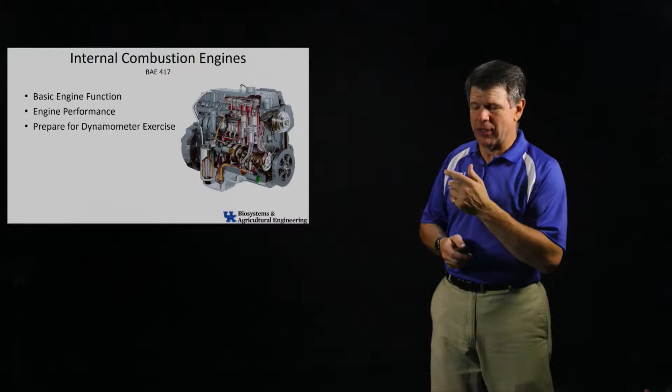The second stroke, then, the piston goes up. This is what we call the compression stroke. And in the compression stroke, we're actually taking that gas, compressing it to some pressure, and then at the top of that stroke, or very near the top of that stroke, when that piston gets to the top, we're going to ignite that fuel. When we ignite that fuel, it burns, thermal expansion.

It's going to push that piston down, and then we get the stroke, what we call the power stroke. And that's where the piston comes down, the exhaust is burning, it's expanding, it gives us the power, pushes that piston down. And then when we get to the bottom, now we have all this burnt fuel inside the cavity above that piston, and we've got to get rid of it, those exhaust gases.

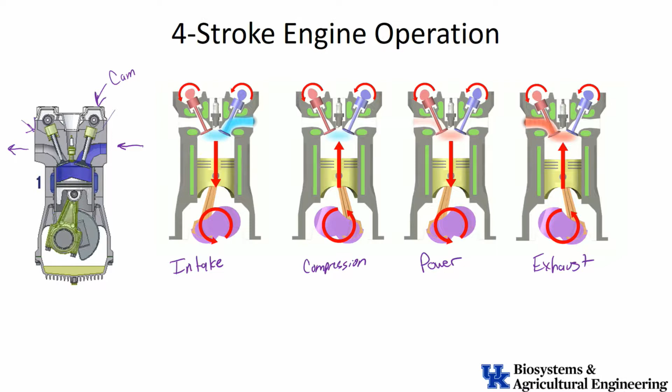So that's the valve that lets the exhaust come out of the engine. Okay, so this is a four-stroke cycle that we see working. Fairly simple, fairly basic. And again, it's what was developed back in the early 20th century to make an engine work.

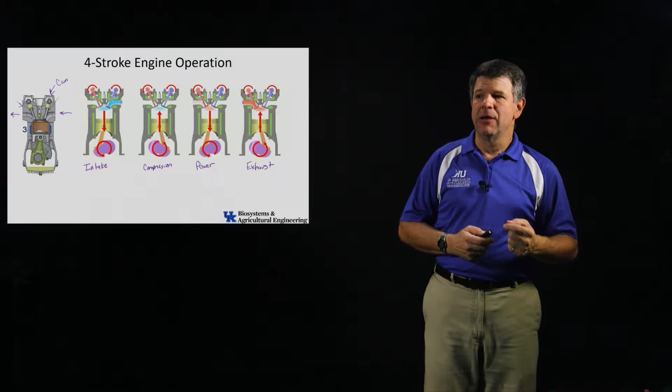There's been a lot of refinements on that, and we could spend a lot of time looking at details, and we won't in this class. Again, we're looking at an overview, a fairly broad picture idea of how these things operate, but that's the fundamentals of the four-stroke engine. Four strokes: intake, we pull the gas in, we compress it, we have a power stroke, and then we have the exhaust that we have to get rid of.

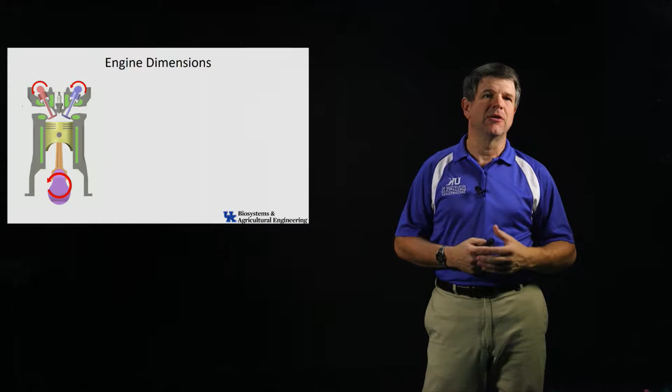Okay, let's go a little bit more into detail here and talk about engine dimensions. So let me look at the engine, and we characterize the engine by its displacement. We talk about so many cubic inches, so many liters, if you see it on automobiles and everything else. How is that defined?

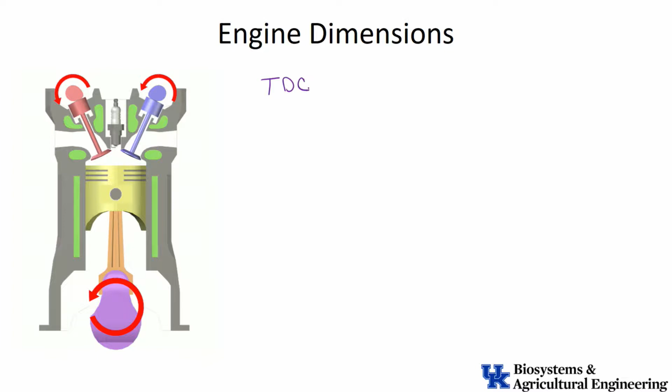So let's look at the graphic here, and you can see this same piston we have, shown at the very top of its stroke. This we actually call top dead center, TDC, or sometimes head dead center, HDC. So when it's at the top, we say it's at the top dead center or the head dead center. I'll make a mark here for where the top of that piston is right now.

Now, when that crank turns around, as you see at the bottom here, the crank is going to move around. It's going to come down to the bottom, the crank will be located down here, and that will pull this piston down to some location. This would be the bottom, so we would call this the bottom dead center, or sometimes we call it crank dead center, CDC. So either bottom dead center, BDC, or crank dead center, CDC.

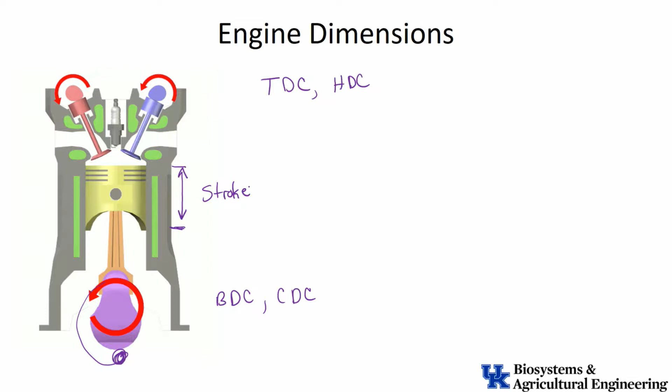The distance in between these two is what we call the stroke. That is how far that piston moves in one stroke. That gives me the displacement. So the displacement then, when I define the displacement of the engine, it is going to be based on that stroke. Let me look at my notes to make sure we stay consistent with your textbook and everything.

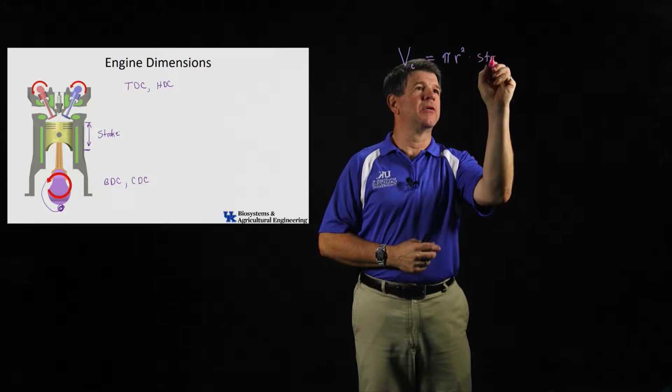We call this V sub C, and V sub C then is the displacement, or the volume that is displaced by a cylinder. It's very simple, it's just a cylindrical equation. So pi times the radius of that cylinder squared, pi r squared, gives me the area, times the length or the height of the cylinder, which is going to be the stroke. That's the distance you see over there, the stroke of the cylinder. So it really has nothing to do with the dimensions or what else is going on in the cylinder.

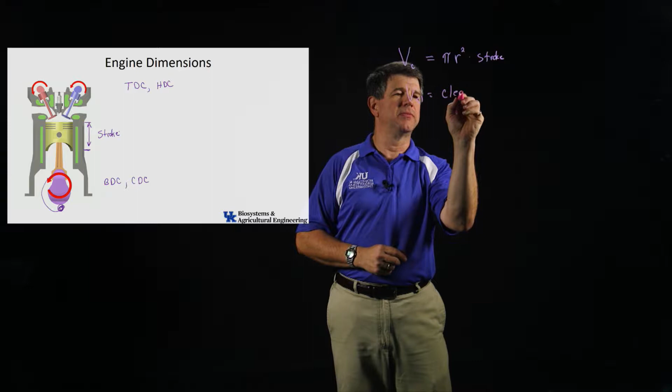Now look at the top of the cylinder. You can see at top dead center, as shown here right now, there is some space on the top of that cylinder. That space above the cylinder we call the clearance volume, V sub CL. When that piston comes all the way to the top and gets to the very top of its stroke, you can see there is some space up there. The volume does not go to zero. That clearance volume is going to be pretty critical in how we define what happens in the cylinder to get to the compression ratio, which is what we really need.

So let's define something else. Let me define the total volume, V sub T, the total volume of that cylinder. The total volume is equal to the clearance volume, V sub CL, plus V sub C, which is the volume displaced by one cylinder. So that's the total volume.

Now the critical thing, for engines and different kinds of engines—we're going to start looking at spark ignition, gasoline, and diesel engines, which are compression ignition—we need to understand what the compression ratio is. The compression ratio is defined as the total volume divided by the clearance volume. So be clear about that: it's the total volume, the amount of gaseous space above the cylinder when it's all the way at the bottom, divided by the clearance volume.

That's the total volume of that cylinder. The ratio of that to what's left after we squeeze it all the way up tells me how much I'm going to compress this gaseous material. So what is its compression ratio? How much is it going to compress? That's critical to how an engine functions. So that's the total volume and the compression ratio.

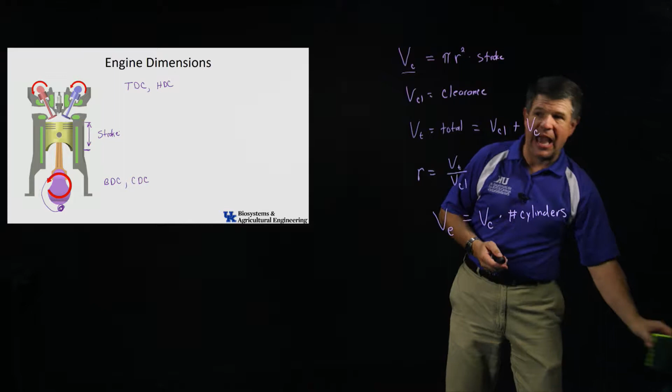Okay, so let's take a look now that we have that defined and understand what's going on. Let's look at how we actually ignite this fuel. We're going to look at two fundamental kinds of engines: a spark ignition engine and a compression ignition engine.

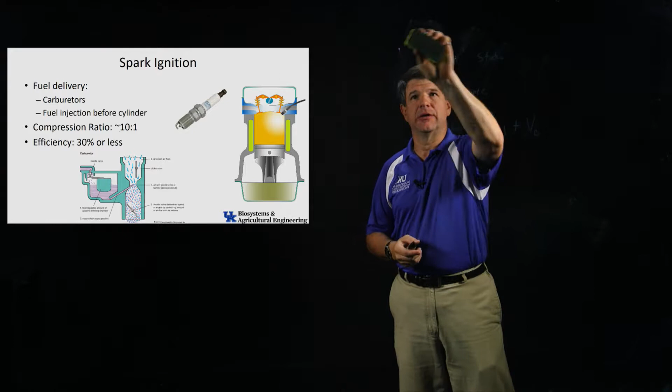First of all, spark ignition. Let's take a look at a spark ignition engine. You can see here that we allow that fuel to compress, and we light it with a spark. The picture in the middle is a spark plug, and right in that area we create a high voltage electrical charge, an electrical spark, that will light the fuel.

So in a spark ignition engine, the gaseous material we bring into the engine on the intake stroke is actually a combination of air and fuel, an air-fuel mixture. On that intake stroke, we pull in the air-fuel mixture and then compress it to some point. The compression ratio for a spark ignition engine is approximately 10-to-1.

Now let me talk about that compression ratio and the fuels a little bit, because this is critical to understand, especially when we get to diesel, spark ignition, and compression ignition engines. Any type of fuel, when mixed and gaseous in a certain proportion, if I compress that mixture enough, it will auto-ignite. It'll burn, basically explode.

So when I pull in that air-fuel mixture into this cylinder and compress it, I want to make sure it doesn't start to burn before I want it to. Because if that piston is still coming up and we get to a high enough pressure, which we get in these cylinders especially considering the temperatures these engines run at, I want to make sure it doesn't ignite before the piston reaches the top. If it ignites while the piston is still coming up, the pressure tries to push that piston back down. The engine won't work well, it may stall completely, it's going to rattle, and very likely it will damage the engine if those things happen.

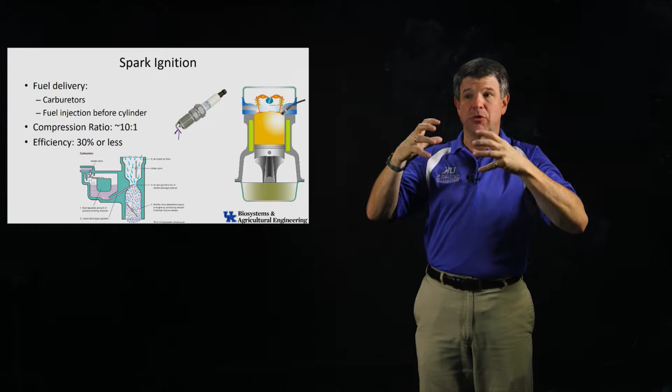I can control when it ignites, and usually that happens a little before it gets to the top, because it takes a while for that spark to ignite the fuel and build up pressure. So I start a little early, right before the piston gets to the top, I ignite it. Then when the piston starts back down, the fuel is expanding and pushing it, kind of like that bicycle - I'm pushing down on the pedal, so that crank on the bottom is like your bicycle pedals. I push down and then let it come back up and exhaust it out.

So that's the compression ratio and why it's important, and the auto ignition of a fuel that we need to keep in mind. We'll come back to that and talk about octane and cetane and those kind of things with fuel in a later module. Those will become important. But how do we get the fuel into the engine?

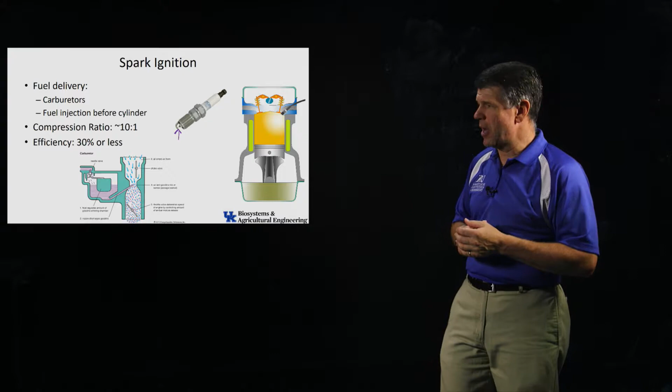You see on the bottom, that picture there is a carburetor, and that's typically, especially in older technology, what we would use. On that carburetor on the left-hand side, this is actually a well of fuel - we have fuel just sitting in this chamber. We have a valve that allows the fuel in, and a float that sits on top of the fuel and keeps the right amount of fuel in there.

From that fuel there's a small passage, and we'll often call this a jet. So this would be the jet. If you hear people talking about jets in their carburetors, it's basically this - we have to carefully control the size of the opening, the size of the jet that pulls that fuel into the airflow mixture.

In this particular carburetor, we're showing the air flowing down through it, though it can flow sideways in different directions depending on the design. As the air comes down through the carburetor, we push it through a constriction. What happens when I constrict a fluid flowing through a place like that? As the area gets smaller, the velocity gets higher. So this air is going to be moving faster as it comes through that constriction, and that also means less pressure - hence a venturi. We basically create a venturi effect in the carburetor right there.

So now, with that negative pressure, we can actually pull the fuel out of the bowl. The fuel then gets mixed with the air, goes through the carburetor and into the engine, so now we have this air-fuel mixture that goes into the engine.

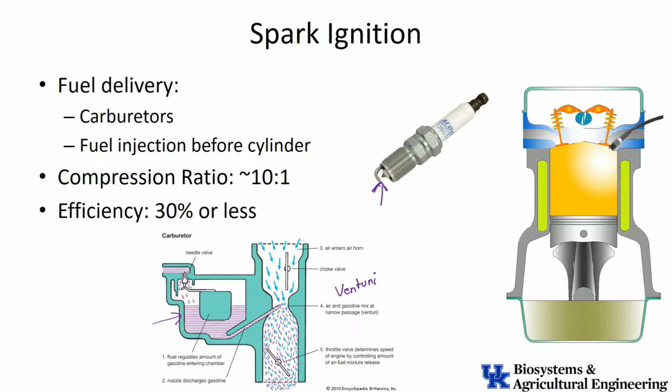So that is basically how they work, how we get the fuel into it. Again, that's somewhat legacy, old technology, because in a lot of our modern engines, especially most automobiles, they're spark ignition engines that run on gasoline or ethanol - that's the fuel we typically use, or a mixture of those two. Those are our spark ignition engines, but a lot of those talk about them being fuel injected, so carburetor technology is somewhat old and really used mainly on smaller engines now.

On most of our new engines, when we have a lot of electronic controls and everything, they're going to be fuel injected, which means instead of relying on the venturi to suck that fuel in, we're going to have a positive pressure pump. We're actually going to physically pump that fuel, inject it, and atomize the fuel into the airstream before the cylinder.

Now the last point on the slide is efficiency. We'll come back and look at PV diagrams and some thermodynamics, and you'll see that the efficiency of these things is about 30%. What that means is if I look at the amount of thermal energy in the fuel that goes into a spark ignition engine, I can recover about 30% of that in useful mechanical work.

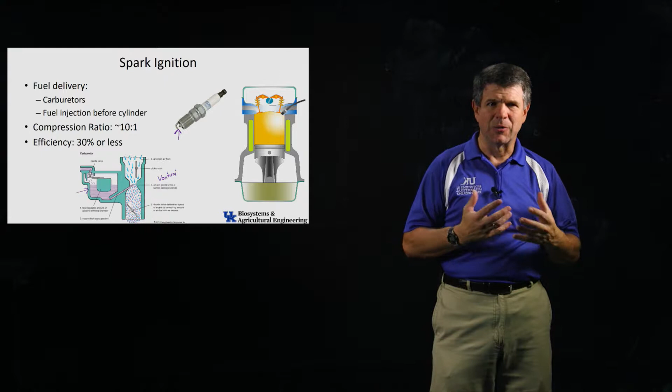The other 70% of that, a lot of it is going to heat. So the engine gets hot, and we have to cool it off with radiators and cooling packages, which we'll look at in a little while. So a lot of that stuff is thermal energy. How can we recover that? There's some things we can think about as engineers, like can we use that energy for some other purpose? I'll show you some ways we can recover some of that thermal energy. But that's where we are with the spark ignition engine.

Now let's take a look at compression ignition engines. They're a little bit different, and again we go back to the auto ignition properties of the fuel. Compression ignition does not use a carburetor. In fact, when that compression ignition engine is on the intake stroke, it's pulling in clean air, so there's no fuel in the air that it's actually pulling into the cylinder.

So we put the fuel in after we compress the air. Here's the reason: the compression ratio of a compression ignition engine is much higher than the spark ignition engine. We're looking at a compression ratio of 15 to 20 to 1, whereas spark ignition engines were about 10 to 1. That higher compression ratio is above the auto ignition properties of the fuel, which means if I had a fuel-air mixture in there, the fuel would ignite before the cylinder got to the top. But I'm going to allow that fuel and air to get up to the top, and compress it to a much higher pressure than what I do in a spark ignition engine.

Now when the pressure is high, I'm going to inject the fuel into that compressed air. So I have a very high pressure fuel injector that injects the fuel directly into the engine. It has to atomize it, and there's a lot of design work that goes into the nature of that injector: what pressures do I use to put it in there, how do I get it atomized, how do I get it spread throughout that whole space above the cylinder? Because if I just have fuel on one side and air on the other, I need that fuel and air to be mixed together, or it's not going to burn very efficiently.

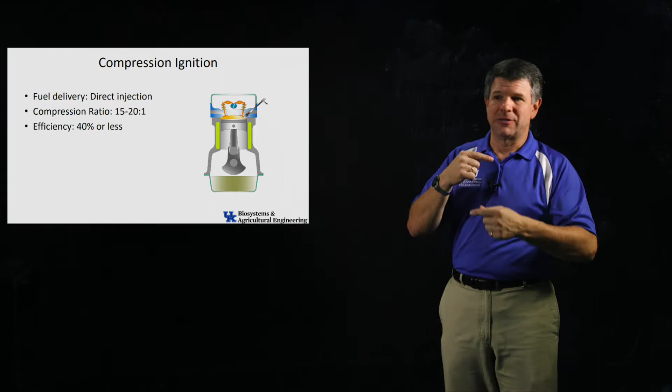Compression ratios, again, are higher, 15 to 20 to 1, something like that. That makes it a little more difficult to start a compression ignition engine. They're harder to turn because I have to get the engine spinning to start it, so it takes more energy to make the engine work against that high pressure to get it started. That can become a challenge with compression ignition engines.

Now, I can gain a little bit more efficiency out of them. About 40% is the theoretical ceiling on the efficiency of a compression ignition engine. We'll look at that, and again come back to the PV diagrams, and talk about why that is and the difference between spark ignition and compression ignition engines, and how we can get more out of it.

Again, the fuel used in a compression ignition engine is typically diesel fuel. That's all of our agricultural tractors, unless it's a very small utility tractor—everything with any size runs on a diesel engine. Of course, all of your over-the-road trucks run on diesel engines. We'll look at performance in a bit and talk about why diesel is better suited for field operations like that, where we're using a lot of torque and pulling heavy loads, as opposed to automobiles and so forth. So that's spark ignition and compression ignition, basically how they operate.

Let's take a look now—we've talked about 4-stroke engines. I want to take a few minutes and talk about a 2-stroke engine, because there is such a thing as a 2-stroke. In a 4-stroke engine, that's the same animation you see on the left-hand side. The 2-stroke only has 2 strokes.

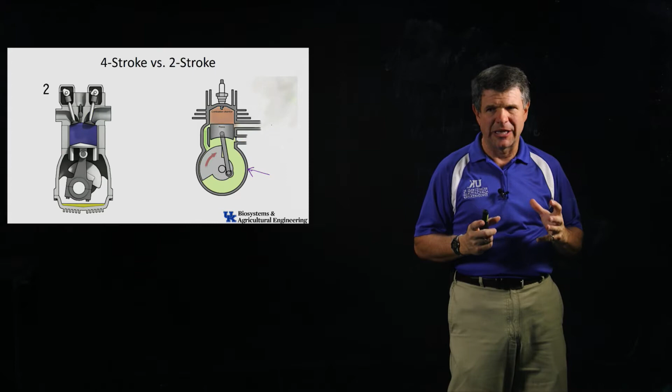We also see them in small engines, like chainsaws and string trimmers and stuff like that. Again, it's something I have to carry, lift, and manipulate, so the lighter I can make that, the easier it is for the operator. So that's one of the advantages: they're very power dense.

You can see that there are no valves in them. On the left-hand side, the 4-stroke engine has those valves on top, with a camshaft that rotates around and has to rub against the top of those valves, creating friction. I have to have lubrication up there and think about how to lubricate that. I don't have those moving parts on a 2-stroke engine, so it's a little bit simpler.

However, look at the area underneath the piston. In the 4-stroke engine on the left, shown at the bottom, you can see that yellow well of material. That's motor oil. You have to put lubricating oil in an engine, and in an actual engine it would be a little higher than that, splashing around in that chamber underneath. There would actually be a pump that moves that oil up to the top of the engine to lubricate the camshafts and everything up there.

In the 2-stroke engine, I can't put oil down there because that's where my air-fuel mixture has to come in. So what do I do? I have to mix some oil in with my fuel. With a 2-stroke engine—motorcycles, chainsaws, and so forth, also some marine applications like outboard engines on boats—you have to mix oil with the gasoline, and that's what provides the lubrication. That air-fuel mixture underneath the piston around the crankshaft carries lubricating oil to lubricate all those parts.

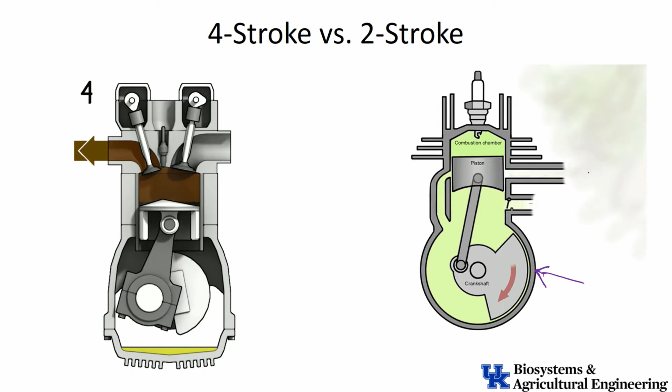Now, what are the implications of all that? I've got oil in the fuel, so that oil eventually gets up into the combustion chamber. What happens when I burn oil? It makes smoke, it stinks, and it's bad emissions. Because I have to have that lubricating fluid in the fuel, and because I don't have a separate exhaust stroke—I'm relying on clean gas to push the exhaust gas out of the cylinder, and the timing is very critical—I won't have a clean exhaust and only clean fuel in the cylinder. So there are going to be higher emissions.

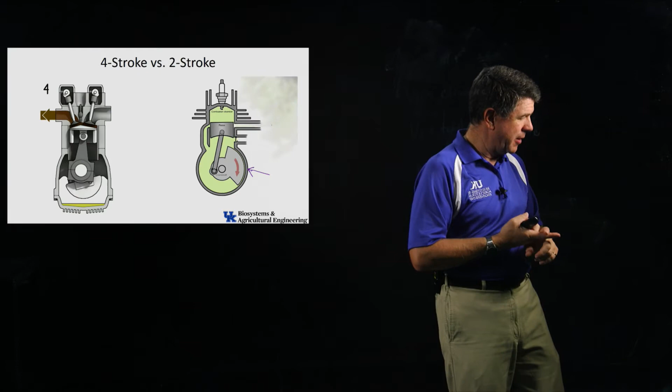Because of that, a lot of places are phasing out two-cycle engines. In fact, in California and other places, they actually prevent the sale of two-stroke engines. Engineers have to come up with four-stroke engine designs that are cleaner, so we don't have the same emission problems to deal with. So again, power dense, no valves, very simple engine, but the bad news is we've got a lot of emissions with two-stroke engines, which is why they're being phased out.

Now, the interesting thing—and I'll tell a few stories throughout this course—is that a two-stroke engine will run forward and backwards, both. I could actually get that crankshaft running the opposite way, and the piston still moves up and down. The direction of crankshaft rotation really does not affect the operation of the piston, so I can actually make the engine run backwards.

In fact, I had a friend growing up who had an old motorcycle with a two-stroke engine in it, and it was never in really good shape—he was pretty rough on it. One time we started it up to go somewhere, and he said, 'This thing sounds funny.'

He put it in gear, and it went backwards. It actually came underneath him because the engine was actually running backwards. So he shut it off and started again, and it started and ran forward. So that can be a possibility.

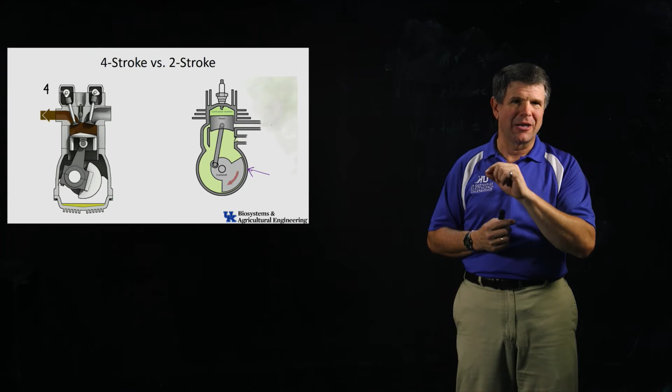Now, the timing, the way the spark is timed and so forth, engines won't run well backwards because they're designed to run forward. That spark happens a little before that piston comes to the top, and if it's running backwards, that spark would actually end up happening a little after that piston, so it doesn't run well, it didn't sound good, and so forth. But that's one of the possibilities.

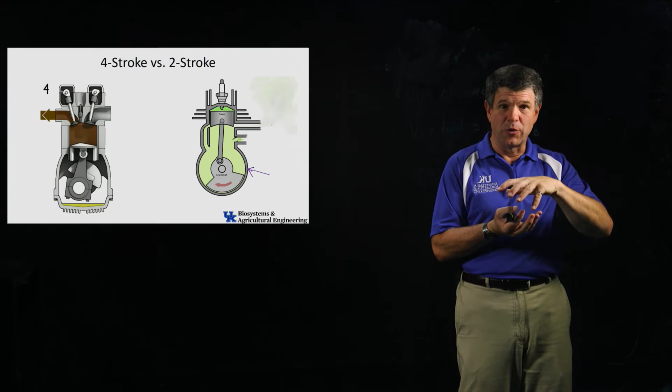So, we've talked about two-stroke engines, four-stroke engines. We've looked at the functionality a little bit, how they work. We're thinking about how we get this fuel. Again, it's a thermal recovery. We take this fuel that has chemical energy, we ignite it, we burn it, we utilize the properties of a fuel that's burning, that it's going to thermally expand, get hot, and we recover that energy out of it.

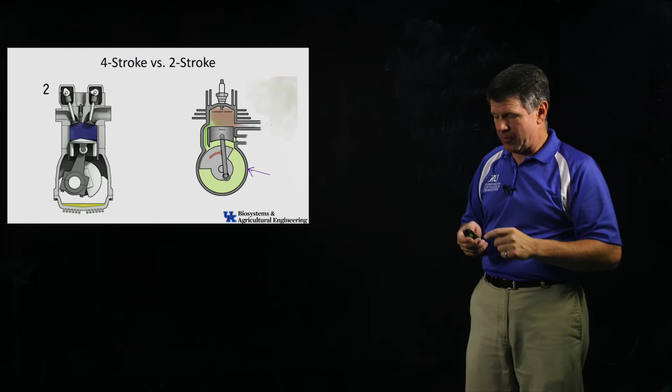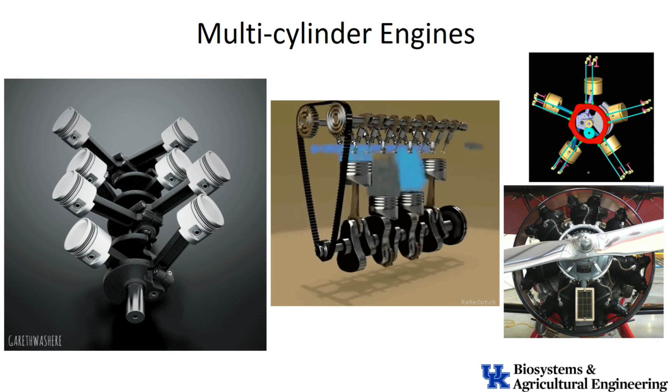So that gives you an idea of how we put all these cylinders together, what the dimensions are, how they function. We'll take a short break here, and in the next module we'll come back and look at how we control these engines, and that's really going to get us into what we're going to be measuring in the laboratory in terms of the dynamometer.